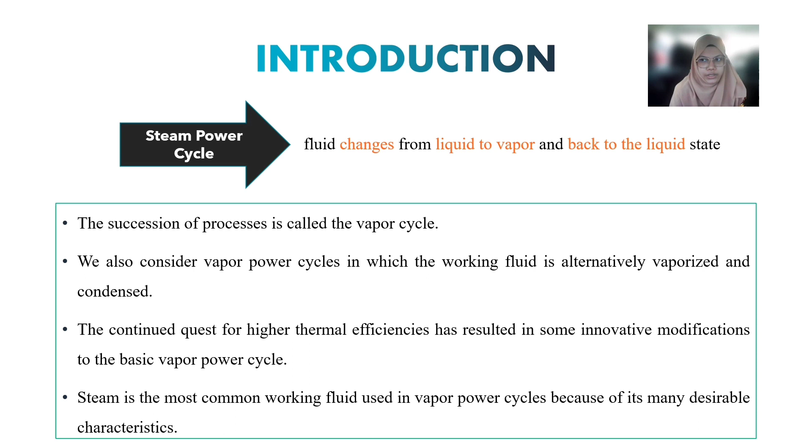Steam is the common working fluid used in vapor power cycles because of its many desirable characteristics, such as low cost, availability, and high enthalpy of vaporization. Therefore, steam power plants are commonly referred to as coal plants, nuclear plants, or natural gas plants, depending on the type of fuel used to supply heat to the steam. However, the steam goes through the same basic cycle in all of them, and eventually all can be analyzed in the same manner. So here are the pros and cons of the steam power cycle.

For the positive side, we can say it can easily be integrated with other power generation technologies. It's a well-established technology, can use a variety of heat sources, and can also be installed anywhere near fuel and water supply.

But there are also some negative sides, which is it produces a large amount of waste heat, has low thermal efficiencies, requires a large amount of water for cooling, and also causes air pollution from smoke fumes.

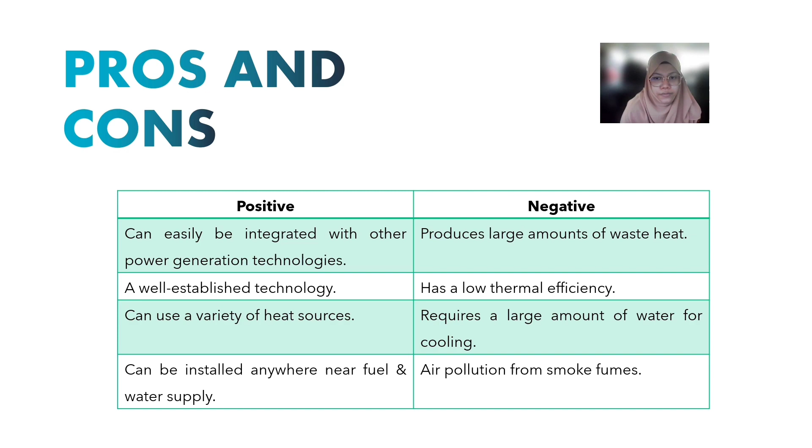I will make a presentation to explain one of our cycles that we use to achieve our objective, which is to find the minimum thermal efficiency of 40%. The cycle that we use is the simple ideal Rankine cycle. By the end of my presentation, we will know whether this cycle achieves the objective or not.

So before we go to the calculation, I will briefly explain the ideal Rankine cycle. The four components of the ideal Rankine cycle are a pump, a boiler, a turbine, and a condenser, all running in a steady flow regime.

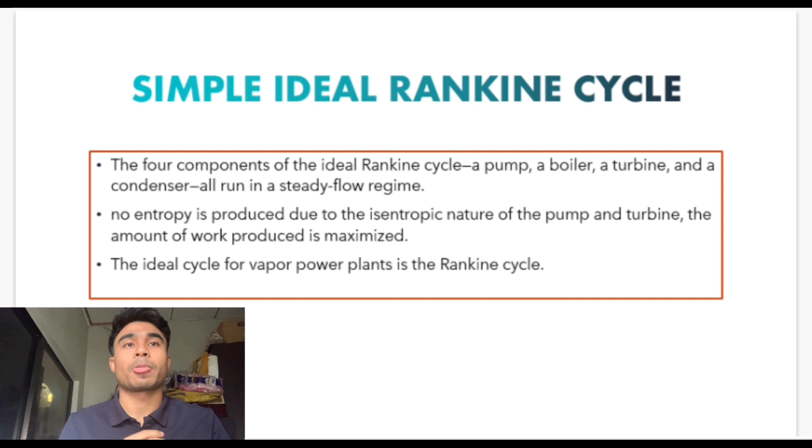Compared to the work and heat transmission, the kinetic and potential energy changes of the steam are so minor that they are disregarded. Since no entropy is produced due to the isentropic nature of the pump and turbine, the amount of work produced is maximized. There is no work involved with the boiler or the condenser. The ideal cycle for vapor power plants is the Rankine cycle, which is why we try to do this cycle.

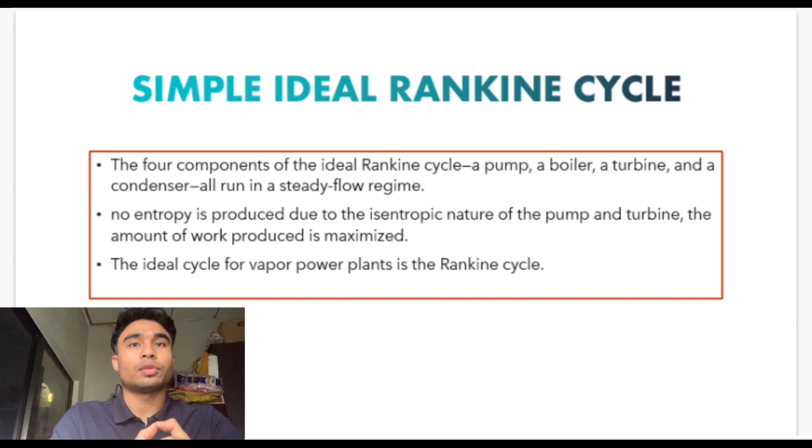The simple ideal Rankine cycle does not involve any internal irreversibility and consists of four processes. There are two diagrams that we use, the TS diagram and the system figures diagram, to make it easier for us to understand the processes that happen in this cycle.

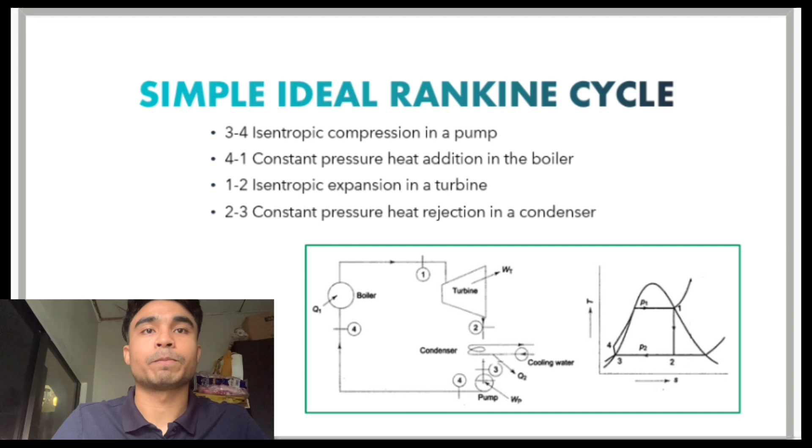So from 3 to 4, the process is isentropic compression in a pump. Then, from 4 to 1, it becomes constant pressure heat addition in the boiler. Then from 1 to 2, the process is isentropic expansion in a turbine. Lastly, from 2 to 3, the process is constant pressure heat rejection in a condenser. Then we go to our calculation.

We assume that steam enters the turbine at 16 megapascal at 560 degrees Celsius. Then we put P1 equal to P4 in terms of pressure value. We also assume that the condenser pressure is 8 kilopascal, and P2 is equal to P3.

Then the efficiency of the turbine is 0.83 and the condenser is 0.65, according to the question given.

First, we find the value for H and S at 16 megapascal, 560 degrees Celsius. We find the value in the superheated steam table. Then, at 8 kilopascal, we find the value for X2S using the formula S1 equal to SF plus X2S times SFG. As usual, the value we get is from the table at 8 kilopascal pressure.

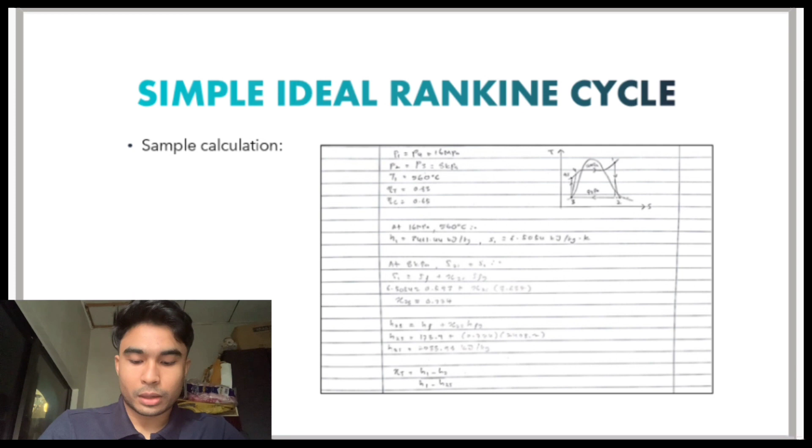Then we go to state 2, the enthalpy state, which is H2S. We find our H2S value using the formula HF plus X2S times HFG. After that, by using the turbine efficiency formula, which is H1 minus H2 divided by H1 minus H2S, we get the value for H2.

Then at state 3, at 8 kilopascal, we find the value for H and V from the table. Then we use that value in the work pump ideal formula to get the WP value.

After we get the WP value, we calculate the WP actual value by dividing the WP value we just got by the turbine efficiency, which is 0.83. Then we find our H4 value using the formula H3 plus WP actual.

Then for the W net, we use the formula: mass flow rate times (H1 minus H2 minus H4 minus H3). We assume the mass flow rate value is 120 kg per second.

After we get our W net value, we find our power in using the formula mass flow rate times H1 minus H4. Then we just put our H1 and H4 values into the formula and we get the power in value.

Lastly, to find our thermal efficiency, we use the formula W net divided by power in. The thermal efficiency value we get is 35%. So we did not achieve our objective, which is to get a minimum of 40% thermal efficiency.

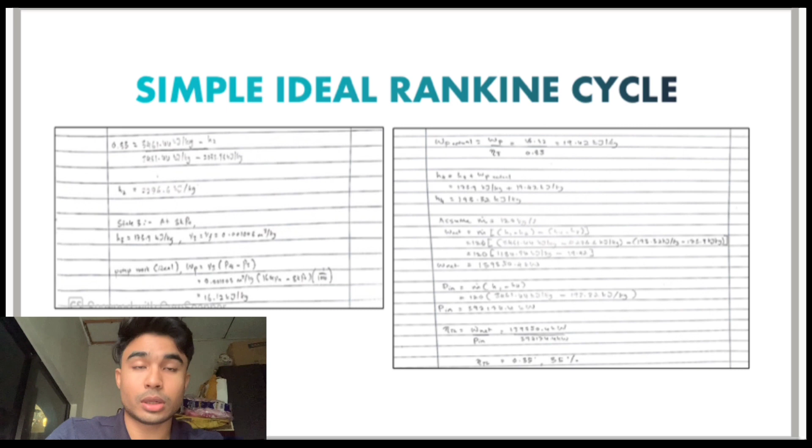So to achieve our objective, we use another cycle process to get the minimum of 40% thermal efficiency, which will be explained by my friends.

Okay, we continue with the reheat Rankine cycle. First we address two issues. The turbine is a two-stage turbine: the high pressure stage and the low pressure stage, with a reheat in between, which is frequently utilized in genuine steam power plants.

Second, the steam is warmed at constant pressure to the first intake temperature in the boiler during the first stage, which is the high pressure stage, expanding isentropically to an intermediate pressure.

Third, the steam expands isentropically to the condenser pressure during the second stage, which is the low pressure stage.

So we can see the T-S diagram for the reheat Rankine cycle, and the diagram using the two types of turbines: the high pressure stage and the low pressure stage.

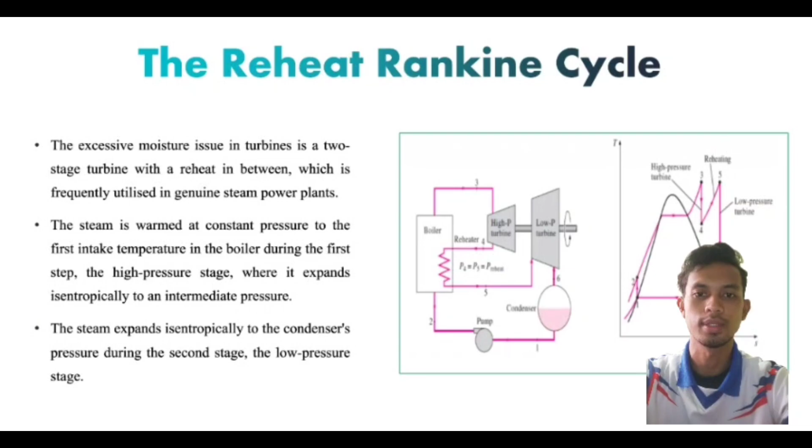We continue with the example of the reheat Rankine cycle. As we know, the efficiency of the turbine is 85% and the efficiency of the compressor is 65%. So how must we proceed to get the efficiency of at least 40%?

First we assume T1 is 20 Celsius and T3 is 700 Celsius. The CP is 1.005 and CV is 0.718. For K we assume 1.4 and R is 2.

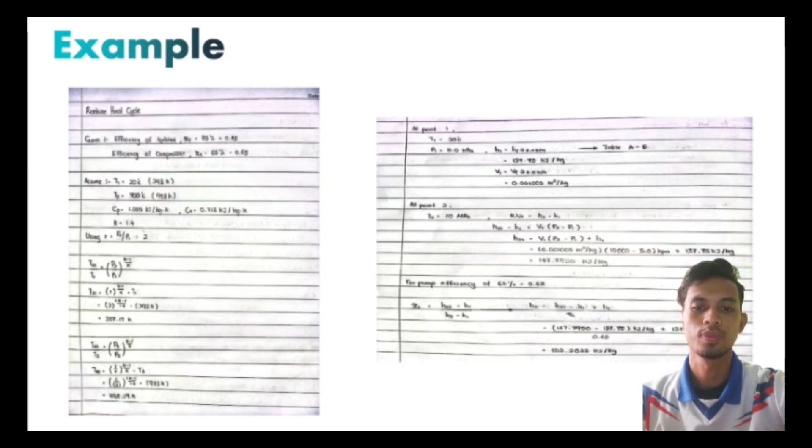For the first step, we continue at point 1. We need to find H1 and V1. We assume T1 is 20 Celsius and P1 is 5.0 kilopascal. From table A5, we can get H1 and V1.

H1 is HF, which we get as 137.75, and V1 is VF, which we get as 0.001005.

We continue at point 2. We assume P2 is 10 megapascal. So using the formula W in equals H2 minus H1, we find H2S, and the answer we get for H2S is 147.7950.

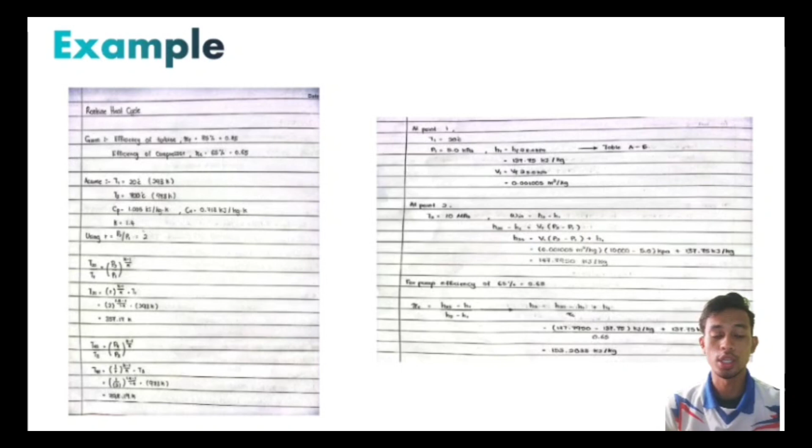After that, we find the efficiency using the pump efficiency of 65% to find H2. So H2 we get as 153.2088. We continue at point 3.

Point 3: we already assumed T3 is 700 Celsius and P3 is 0.2 megapascal... actually for saturation at 10 megapascal, we get T as 311 Celsius.

Then we get H3 as 3876.1, and S3 as 7.0954 from table A6.

After that we continue at point 4. Since point 3 and point 4 have the same S, S3 and S4 are the same: 7.0954.

After that we look at table A5. We find SD at 275 kilopascal, and we get the values of SG, SF, and SFG.

After that, using the formula X4 equals S4 minus SF divided by SFG, we get X4 is 1.0139.

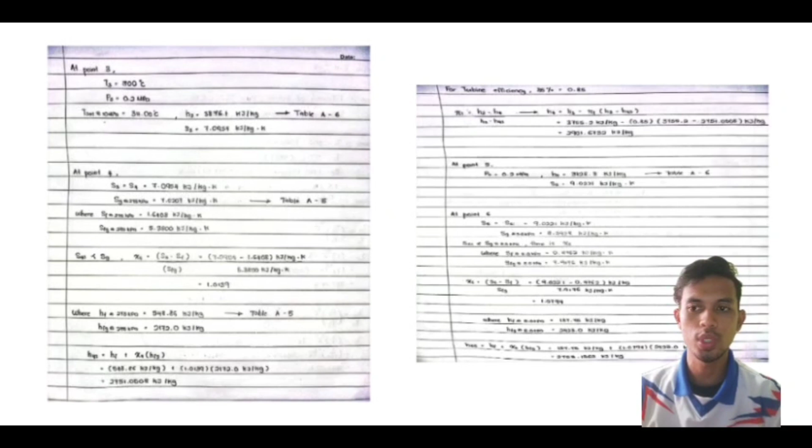After that we continue to find H4S. We look at table A5, get the values of HF and HFG, and put them in the formula, and we get H4S is 2751.0508.

Another step: using the turbine efficiency of 85%, we can find H4, which is 2901.6732.

After we get the answer from that formula, we continue to points 5 and 6. At point 5, we just find H5 and S5 from table A6.

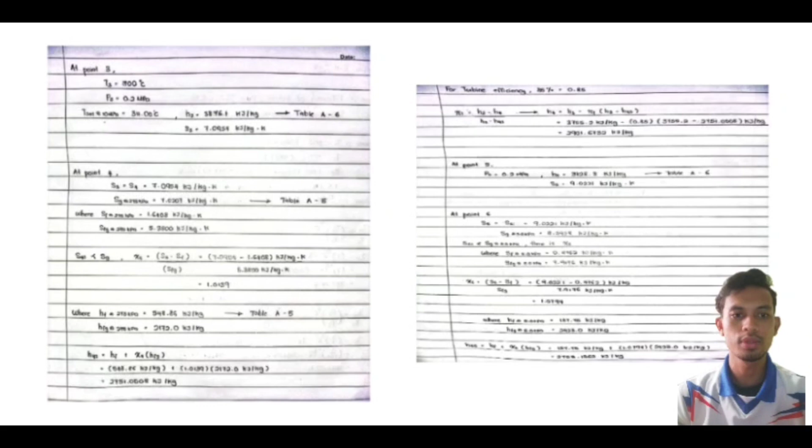At point 6 we need to find the value of H6S, which is 2758.1862. After that we apply the turbine efficiency again to get H6.

After we get all the values from point 1 to point 6, we can calculate Q in, Q out, and W net.

For Q in we get 4753.028, and Q out we get 2791.7358. For W net, it's Q in minus Q out.

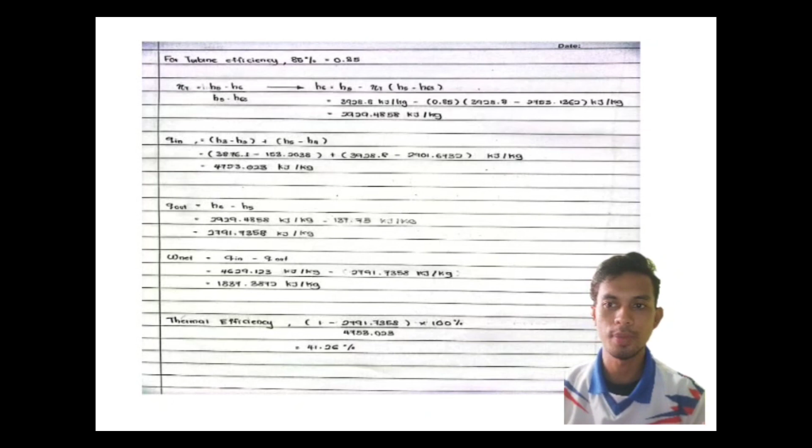For the example, we get 1837.3872. After that we can find the thermal efficiency, and we get 41.26%.

So we achieved the requirement of at least 40%. So finally we get 41.26%.

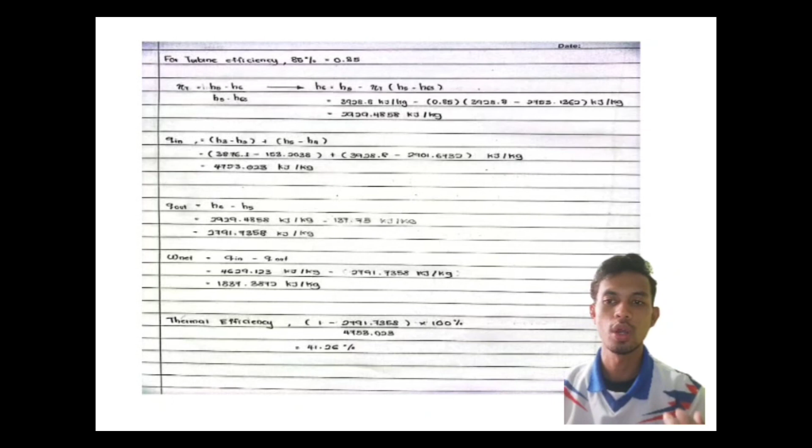So it's achieved. In conclusion, the project objective was achieved by the end of the project because we had fully utilized the theory that we had learned during class throughout this semester to complete our project.

We had chosen two types of designs for the steam power cycle to achieve a cycle thermal efficiency of at least 40%, under the conditions that all turbines have isentropic efficiencies of 85% and all pumps have isentropic efficiency of 65%.

Firstly, we chose a simple ideal Rankine cycle, and then we got 35% thermal efficiency.

Next, we tried the reheat Rankine cycle design to see whether it could achieve our condition, and eventually we got at least 41.26% thermal efficiency, which showed we did achieve all of the given conditions.

Therefore, we could say the Rankine cycle with reheat would be the most efficient option to achieve the required cycle thermal efficiency.